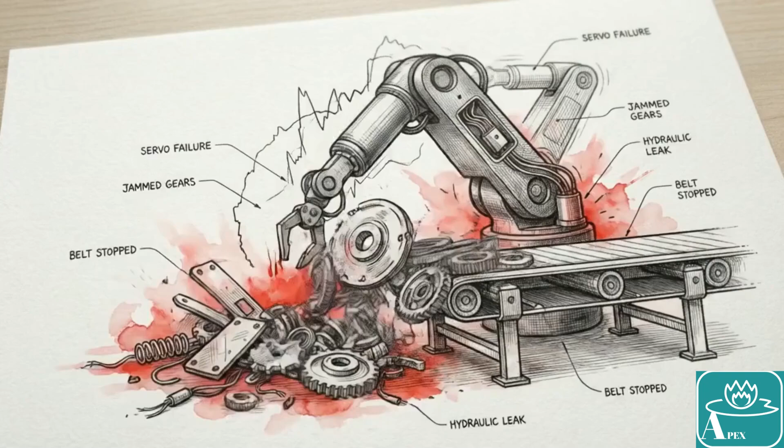At Apex Services, the production line is failing. Machines seize violently, bottlenecks compound by the hour, and unfinished products stack up across the factory floor.

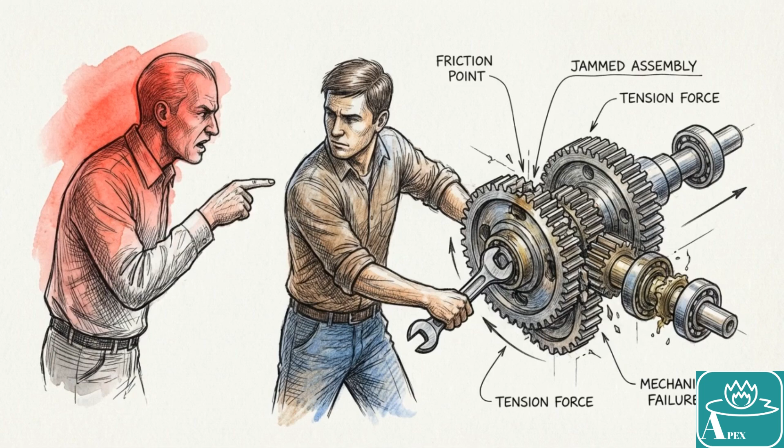When a manufacturing system collapses, the instinct is to push operators to simply work harder. But improving efficiency is a precise science, not a matter of effort. It requires engineering the complete elimination of all operational losses, specifically waste or Muda, unevenness or mura, and strain, known as muri. To transform this failing assembly line into a hyper-efficient system, industrial engineers do not rely on intuition.

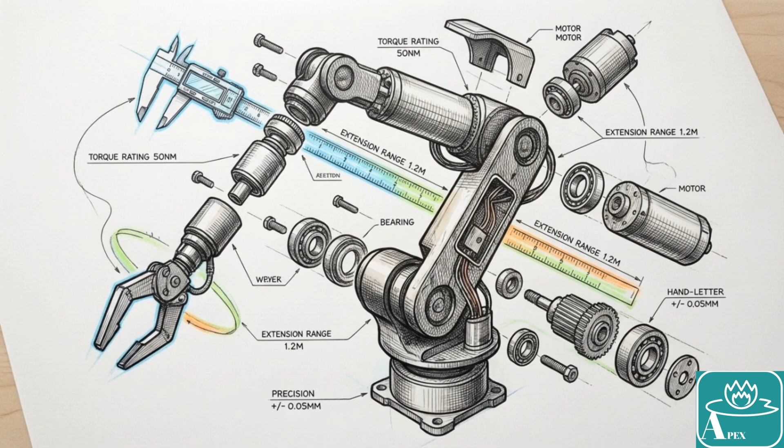They deploy a highly specific stack of analytical tools to dissect the production process and armor it against failure. This transformation begins by stripping away ad hoc troubleshooting entirely. In its place, engineers enforce a rigid epistemological framework known as the QC story. Without this strict diagnostic structure, any attempt to fix a manufacturing line is just guessing at the symptoms. The QC story ensures that engineers are actually curing the underlying disease.

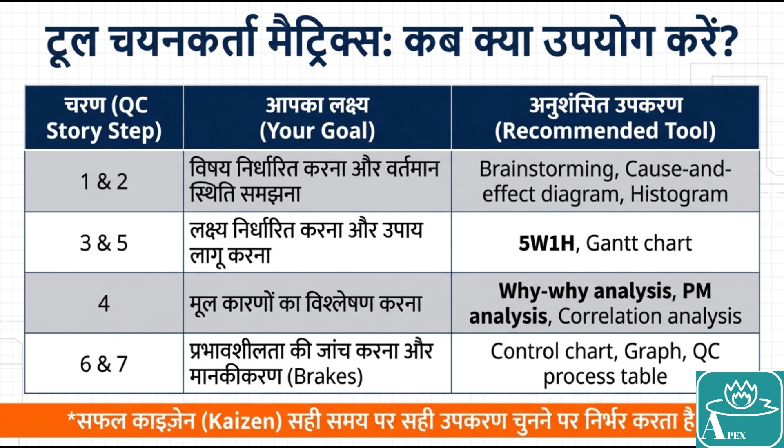Before a hypothesis is formed, the exact current state must be quantified. To capture this reality, teams utilize structured brainstorming. This is strictly governed by 4 rules: absolute zero criticism of ideas, encouraging freewheeling thought, prioritizing the sheer quantity of observations, and associating distinct concepts together.

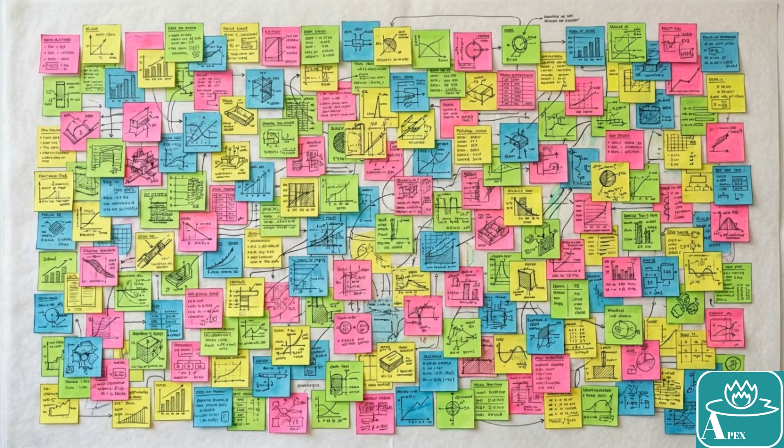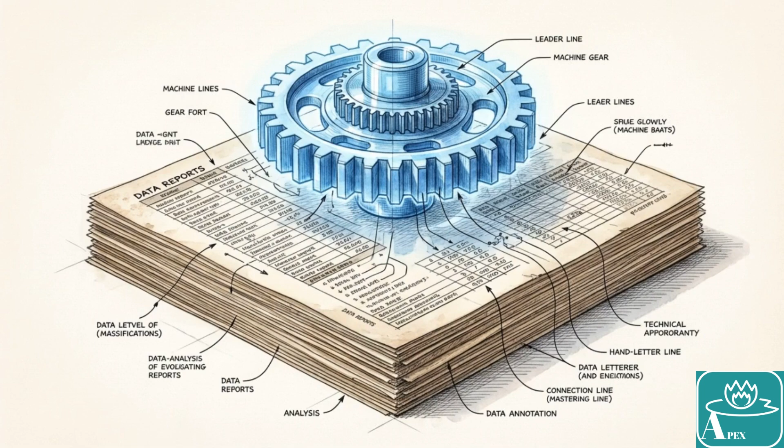Those raw observations are then organized using the KJ method. The KJ method is a structural tool that categorizes massive amounts of qualitative data by their underlying similarities, extracting objective patterns from the noise of the factory floor. By enforcing the QC story framework from day one, engineers lock out premature assumptions. Every subsequent countermeasure they design will be rooted entirely in verified structural data.

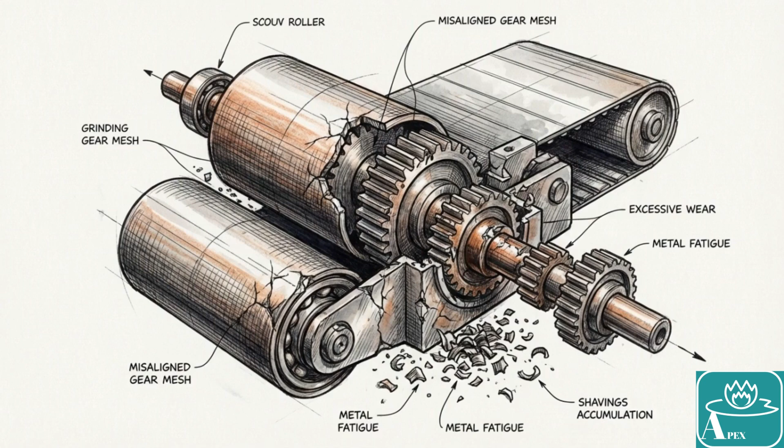Methodologically, the team must drill down repeatedly, asking why up to 5 levels deep. They cannot stop at broad environmental factors. They must reach the foundational mechanical or procedural cause.

This requires a strict rule of backtracking. Once a causal chain is constructed downwards, the logic must be entirely readable in reverse. If cause E triggers D, then D must perfectly explain C, back to the initial phenomenon. If a single branch fails this reverse logic test, the entire analysis is deemed invalid. The team must restart to ensure they haven't omitted a critical variable.

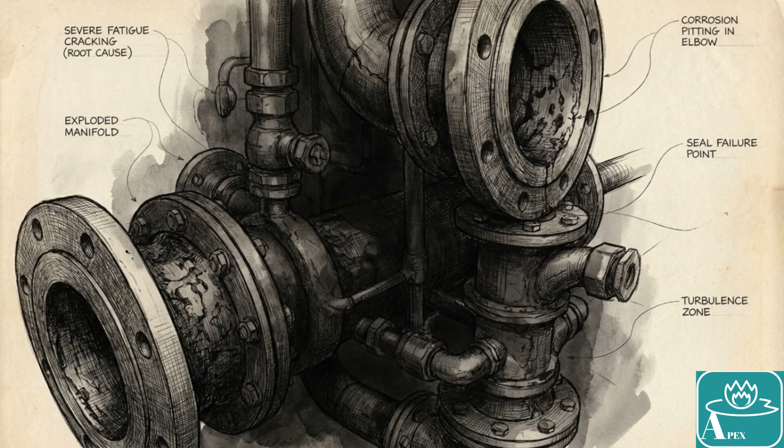Why-why analysis takes a chaotic, multivariable anomaly and forces it into a linear, solvable equation. It guarantees that the resulting countermeasures permanently neutralize the root, rather than temporarily patching the symptom. Acute anomalies are linear, but chronic losses, the subtle, persistent defects that drain efficiency over time, often defy conventional logic trees. In these cases, the critical factors are hidden or deeply intertwined.

To solve these, engineers rely on PM analysis. PM analysis is a diagnostic approach that abandons operator assumptions entirely, forcing the team to analyze the failure strictly through its physical mechanisms. We can observe this physical deconstruction using the mechanics of a simple flashlight. When it fails to turn on, PM analysis doesn't guess the cause. It lists the absolute physical conditions required for the phenomenon of light to occur.

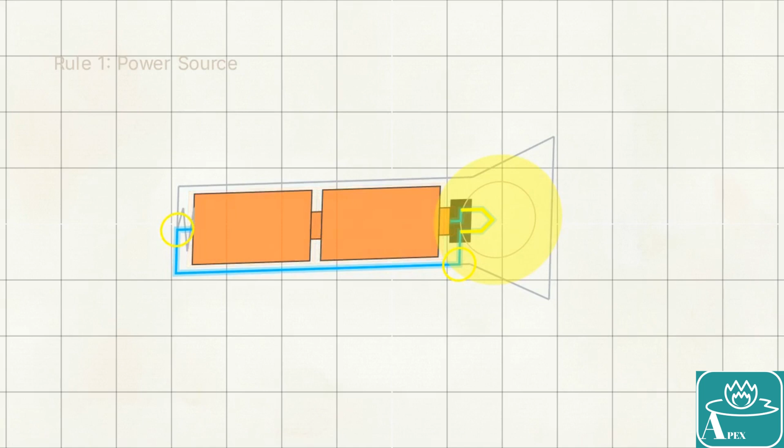First, the mechanism requires a power source. The battery must possess enough internal energy to generate heat through an electric current. Next, PM analysis maps the remaining rules. The path of electron flow must be completely free of rust or disconnection, and the incandescent bulb itself must meet exact designated specifications to withstand the current.

By isolating every required condition, PM analysis proves that chronic failures are not mysterious occurrences. They are strictly the result of measurable physical principles being violated within the equipment's architecture.

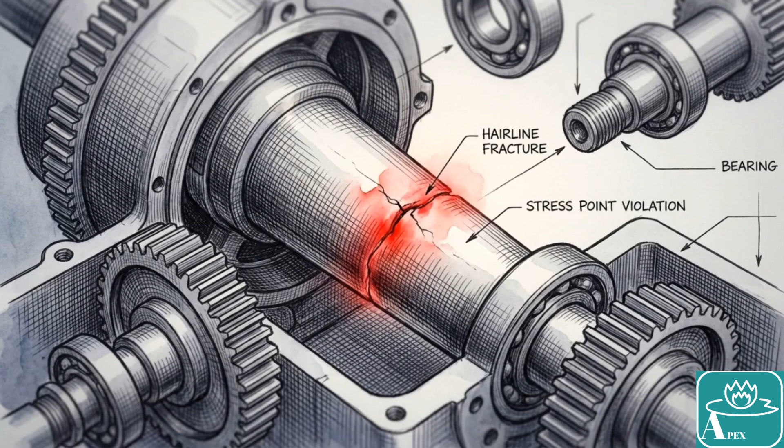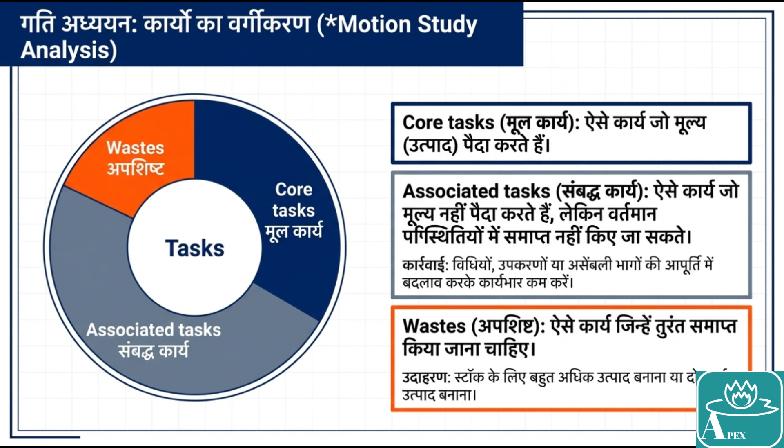Everything else is categorized against it, starting with direct wastes, such as producing defective products or holding excess stock, which must be eliminated immediately. The remaining slice represents associated tasks. These are actions like reaching for tools or unwrapping materials. They produce zero value for the customer, but cannot be eliminated under the current layout.

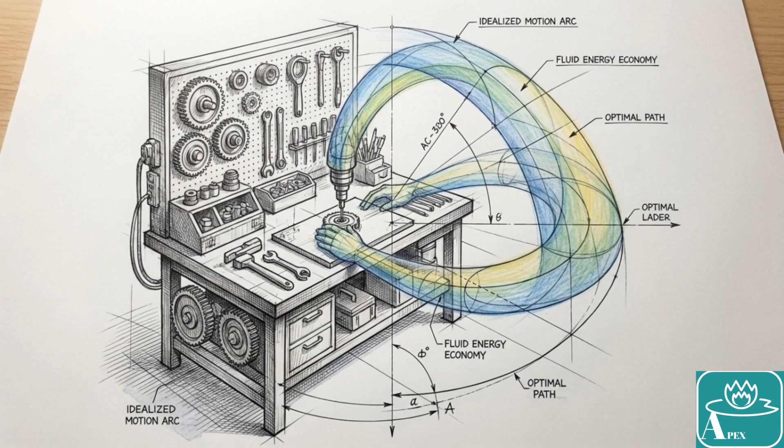To strip down these non-value tasks, engineers apply the ECRS principles. They interrogate the process to see if tasks can be eliminated completely, combined together, rearranged for better flow, or simplified to save time. This drives the overarching goal of motion study. The objective is to design human motion that maximizes energy efficiency and completely eliminates operator fatigue.

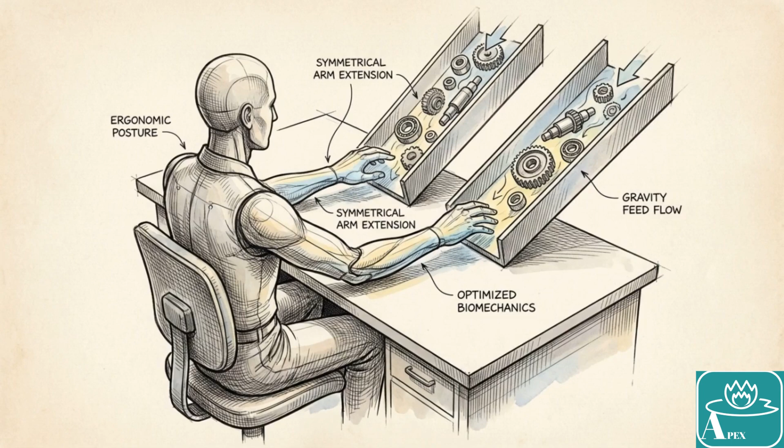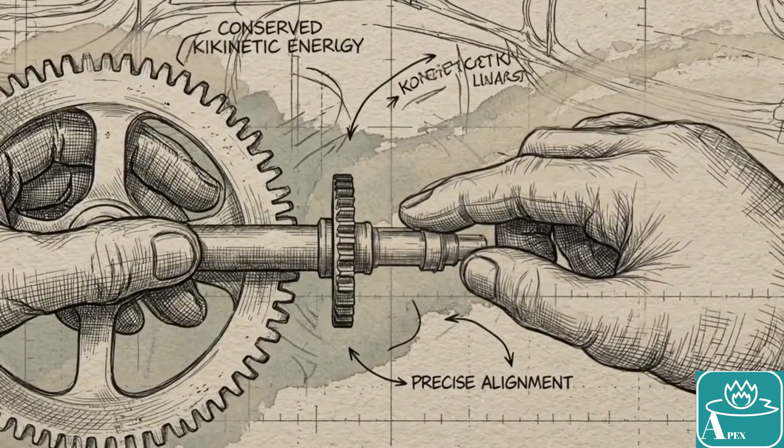Operators are trained in the principles of motion economy. Workstations are redesigned to utilize simultaneous hand movements and gravity feeds while aggressively cutting out needless walking, bending, or searching. The IE method views human physical motion as a finite, highly valuable resource. It must be ruthlessly conserved to achieve maximum operational output.

However, perfecting the mechanics of a single operator provides zero economic benefit if the overall production line remains bottlenecked at the very next station. To synchronize the entire floor, engineers measure cycle time. Cycle time is the actual timed duration a single operator requires to complete their specific assigned sequence of steps.

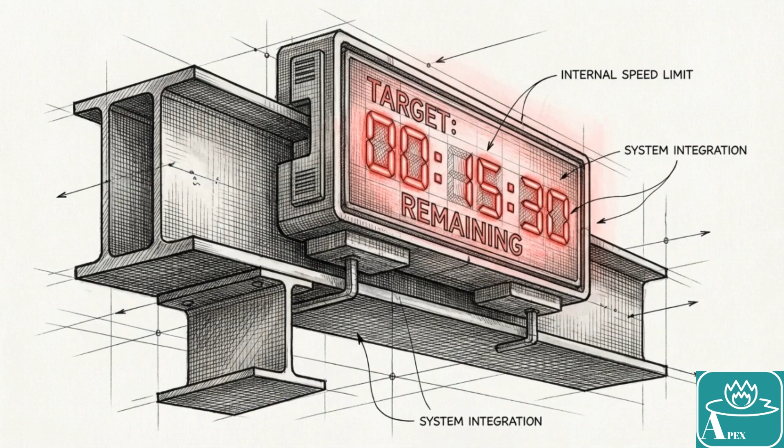They contrast this internal speed limit against takt time. Takt time is the absolute rhythm of customer demand, calculated strictly by dividing the regular operating hours by the total quantity of units required by the market. This pitch diagram visualizes the critical discrepancy between different operator workloads. By plotting the individual cycle times of processes A through E, systemic bottlenecks become immediately visible.

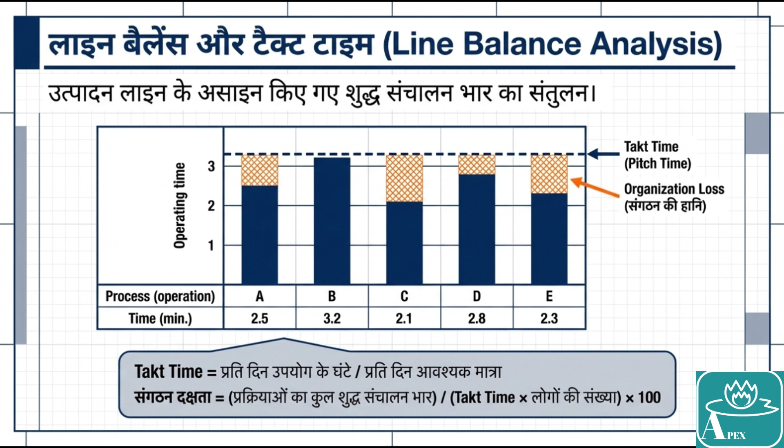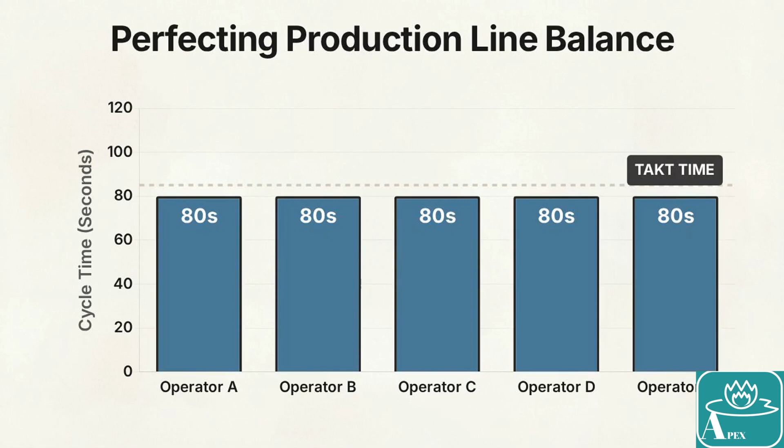The shaded region at the top represents the organization loss. This is the exact volume of wasted capacity and idle labor occurring below the required takt time ceiling. To flatten this chart, engineers rely on the organization efficiency formula. This mathematical tool measures the total net operation loads against the takt time, allowing managers to perfectly redistribute the physical workload across all personnel. Through strict line balance analysis, every node in the production matrix is tuned to beat at the exact same metabolic rate. It prevents both inventory buildup and idle time simultaneously.

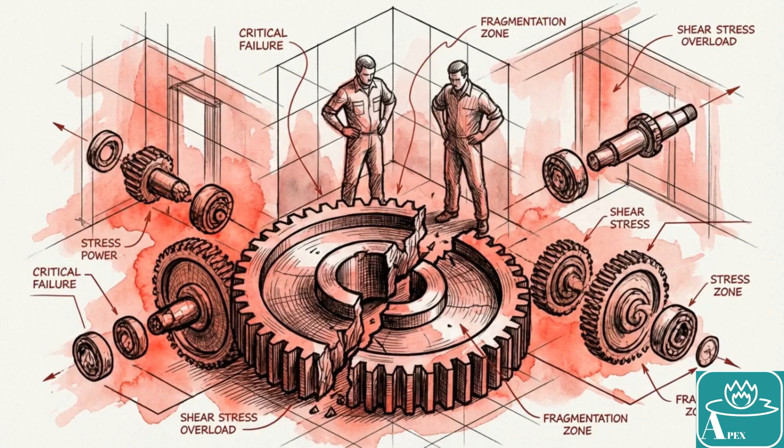The final phase moves the factory from reacting to current failures to predicting and neutralizing future defects before they even occur. This predictive risk modeling relies on 2 distinct methodologies: FMEA, which stands for Failure Mode Effects Analysis, and FTA, or Fault Tree Analysis. This schematic maps the directional logic of both predictive systems side by side.

FMEA operates bottom-up. It analyzes the failure modes of individual component parts to forecast their potential impact on the wider system, ranking every possible accident by probability and influence. FTA takes the exact inverse approach. Operating top-down, it starts with an undesirable catastrophic event, like a total conveyor shutdown, and deduces the compound electrical or mechanical faults that could logically trigger it.

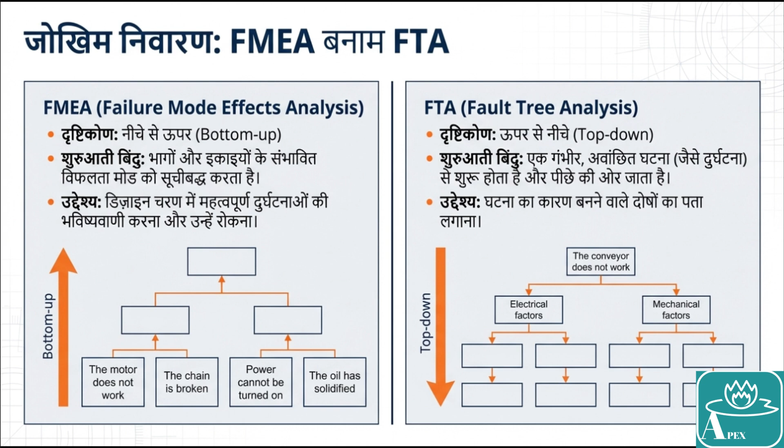At Apex Services, the production line now moves with absolute synchronized precision. Because the line is physically stabilized and risk-proofed, value analysis can finally be applied. Value analysis evaluates the functions of the product itself, sourcing minimum cost material alternatives without degrading the necessary performance.

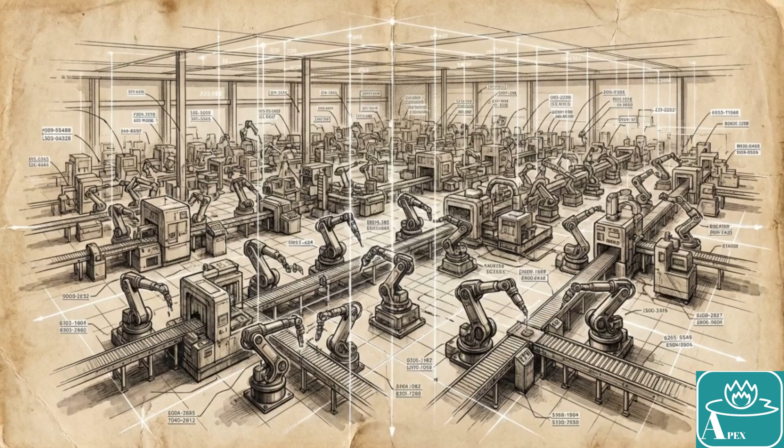This state of operation is the result of a complete engineering stack, enforcing the rigid QC Story framework, executing physical PM deconstruction, balancing the line mathematics, and deploying FMEA predictive models. Operational perfection at an industrial scale is never an accident. It is the deliberate mathematical eradication of the unknown from the manufacturing environment.